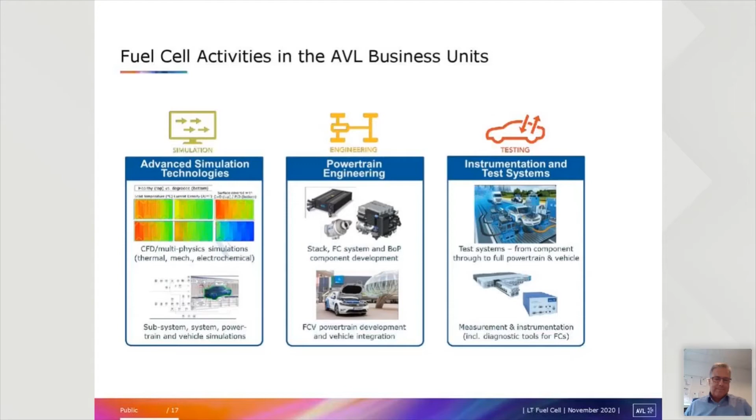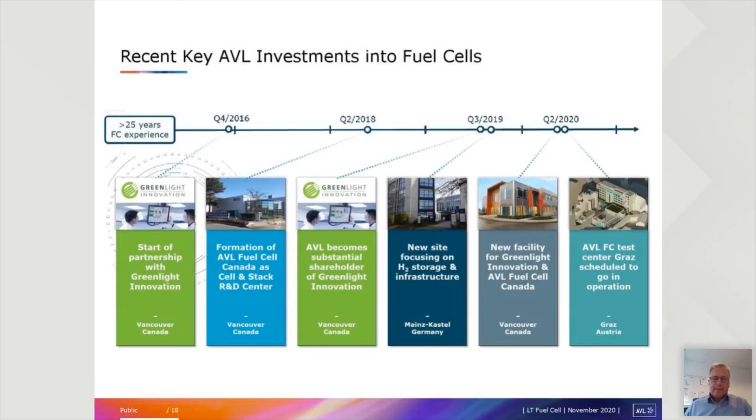We have recently heavily invested into the fuel cell activities by teaming up with Greenlight Innovation on the testing side to strengthen our portfolio in the cell and stack testing area. Besides that, we have ramped up a team in Vancouver, Canada, for research and development on cell and stack level, and we've ramped up the activities in Germany, focusing on hydrogen storage and infrastructure topics. And last but not least, we have strongly expanded our testing and research facilities at the headquarters here in Graz, Austria.

So our activities in the last 2 decades have led to a complete portfolio of development methods and tools both on the simulation side and on the testing side, supporting the fuel cell development in all different phases of the development process, on component, subsystem, system and vehicle integration level. We provide the methods and tools to support cell development with respect to performance optimization and minimization of degradation. We support with our simulation and testing equipment the development optimization of entire fuel cell stacks in order to ensure maximum performance and lifetime.

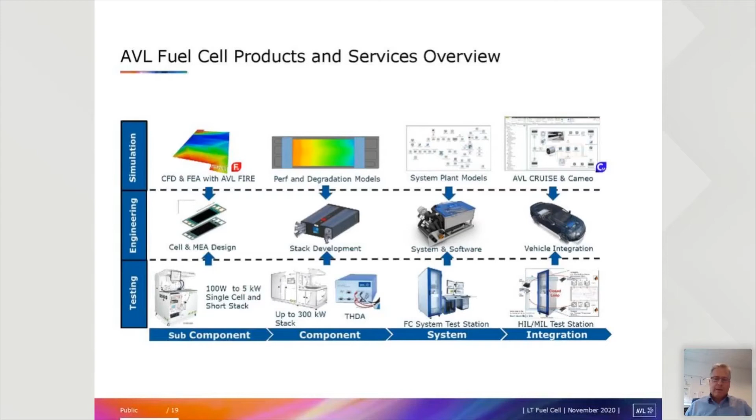We provide the tools and methods for virtual system integration and virtual calibration of control functions. And last but not least, also tools and methods for supporting the vehicle integration and optimization of the entire powertrain for real driving missions.

Let's have a bit of a deep dive into the simulation applications related to low temperature fuel cells. With our multi-physics 3D CFD solution, we're supporting virtual cell development in different aspects regarding flow field design and membrane electrode assembly component selection, with the CFD simulation providing a detailed insight into the media supply, transport and conversion processes, providing information to the engineers on how to optimize geometrical conditions and operating parameters to achieve high performance and long lifetime of the cell.

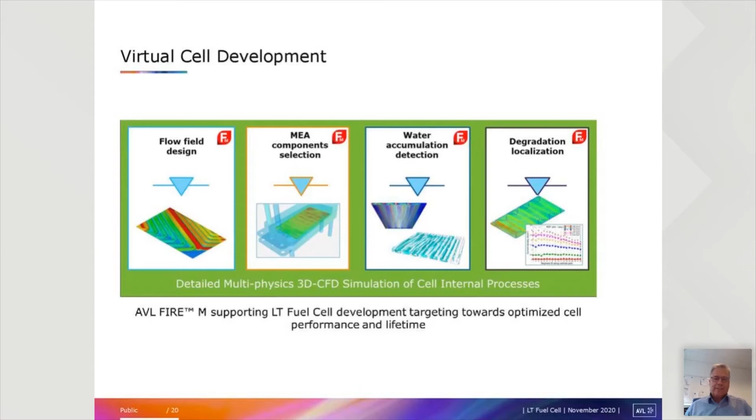We do offer unique features with respect to simulation and handling of liquid water transport and formation, as well as models for simulation of degradation processes, degradation phenomena related to carbon corrosion and ionomer degradation, providing the information required for the engineer to optimize the geometries and the material parameters to achieve the desired lifetime.

Multiphysics CFD is also used for optimization of the media supply and the temperature homogeneity in the entire stack, also contributing to achieving the performance targets and lifetime targets. And it's also used to derive the requirements for the balance of plant layout and component selection in order to supply the hydrogen and the oxygen to the stack and ensure the proper cooling of the stack by proper dimensioning of the cooling system.

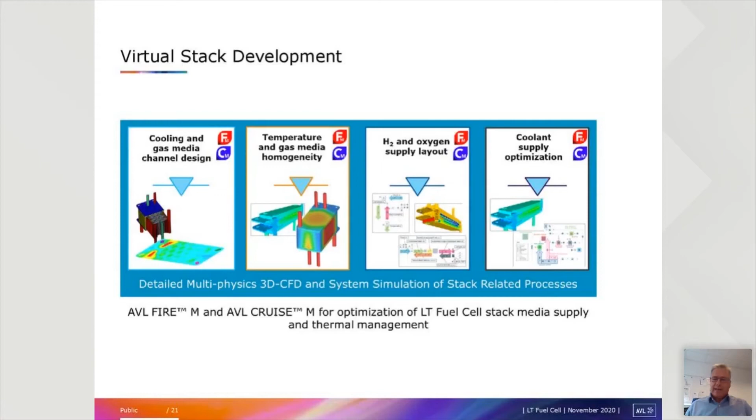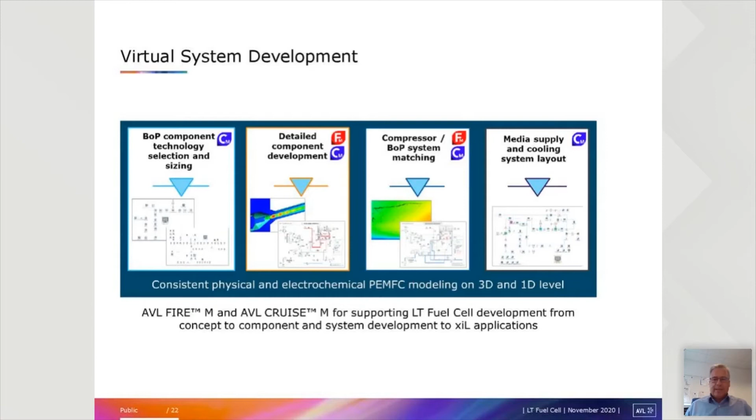And on system level, besides BOP component selection and sizing and detailed component development, there are additional aspects that can be handled by CFD and system simulation, like for instance compressor layout and matching of the compressor to the specific system in order to ensure maximum overall efficiency. And also cooling system layout in order to ensure proper thermal management of the stack for all different operating conditions can be done on a virtual basis by adopting the different simulation tools today.

Well, based on the results and the detailed insight the simulation tools can provide, and in combination with the instrumentation and test systems and test possibilities, it's already possible now to cover the entire development from the early concept phase to component design, to component integration, to virtual validation, from the very first idea to start of production in a consistent and reliable way.

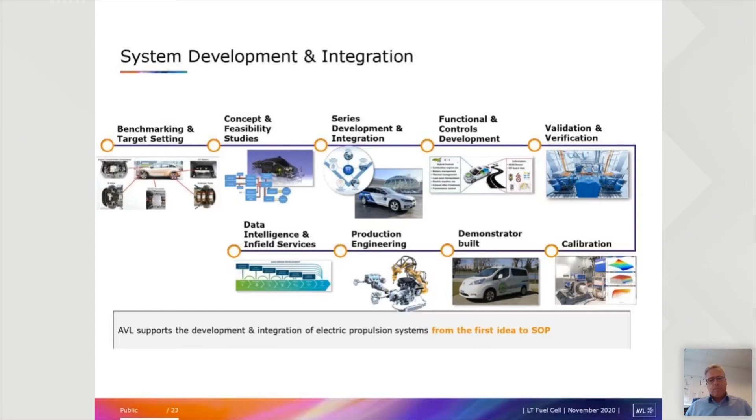It's an excellent image there of how AVL has grown in the new market. Can you let us know how much of the product portfolio now in AVL is focused on fuel cell technology and meeting the hydrogen demand in engineering? Well, there's a very dynamic growth in this area of fuel cell and also electrolyzer cell business. It's not only low temperature fuel cell; it's also high temperature solid oxide fuel cells and electrolyzer technology based on different technology. And so we see a very strong demand and interest from the market to go in this direction, and we're ready to support.

Given the manufacturing base of AVL, how big a hurdle to the hydrogen market is the lack of electrolyzers and fuel cell manufacturers in Europe? Well, that's not an easy question to say. However, we are well prepared to support and serve the industry in ramping up the features and capabilities. And so there are initiatives already ongoing where we are involved, and we're expecting to see growing opportunities in this area.